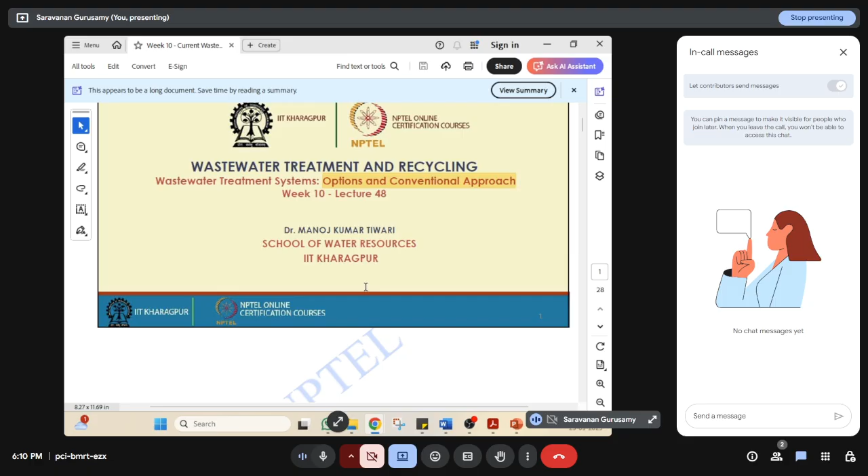Let's move on with the options and conventional approaches for wastewater treatment systems. Earlier we discussed different treatment technologies and how to integrate them. We studied separately about ASP, nitrification and denitrification, and primary settling tanks. Now let's see how to integrate this system.

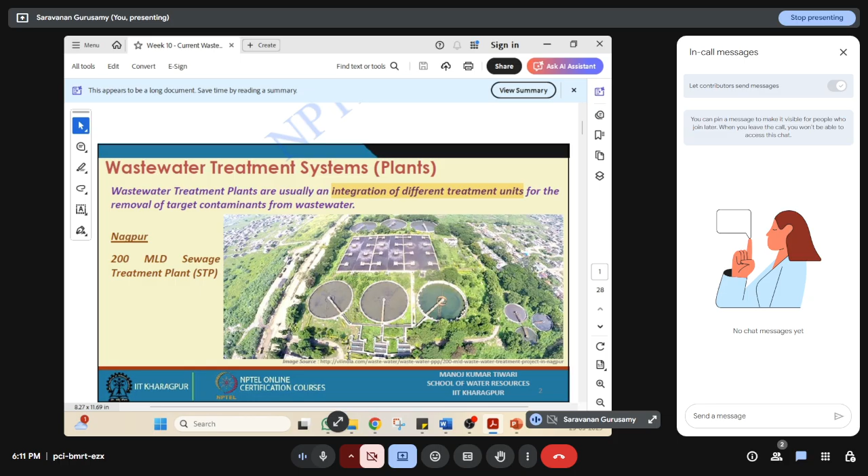For example, if you take Nagpur's 200 MLD STP, there we have an integrated primary settling tank, secondary settling tanks running parallel, along with the aeration tank, followed by sludge management, sludge digester tanks, and sludge dewatering with drying beds, all visible in this aerial view of the Nagpur STP.

Similarly, if you see most industrial units, this picture is from Washington in the US. They have a Blue Plains wastewater treatment plant. You can see how the tertiary treatments are going on in STPs abroad. So several unit operations and unit processes we have discussed.

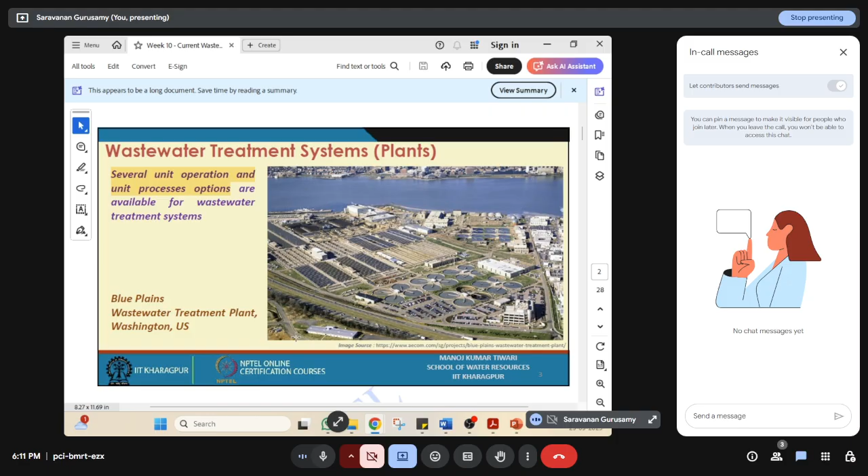Unit operations are physical treatment of wastewater, and unit processes involve biological as well as chemical treatment of wastewater. These several unit operations and unit processes are integrated together to get a complete wastewater treatment system. This is what we have been discussing for the last 9 weeks.

First, preliminary treatment, that is screening and grit removal, then primary treatment focuses on the primary settling tank or sedimentation, which is the major approach to remove suspended inorganics. The secondary treatment plant focuses on soluble organics, using activated sludge process, trickling filters, rotating biological contactors, and membrane bioreactors.

Based on low rate or high rate process, we can classify it into stabilization ponds or aerated lagoons if the quantity is very less. If the quantity is high, like in urban areas, we can go with the ASP process.

In advanced treatment systems, we can go with nutrient removal first, by nitrification, denitrification, chlorination, and phosphorus removal. We can use biological or chemical methods. Biologically, we use phosphorus accumulating organisms, or PAOs. In chemical treatment, we add lime and alum to precipitate the nutrients in the wastewater.

Suspended solids removal is done by filtration, that is membrane filtration. Last week we discussed different types of membranes, from micro, ultra filtration, nano filtration, and RO, and we also discussed membrane fouling.

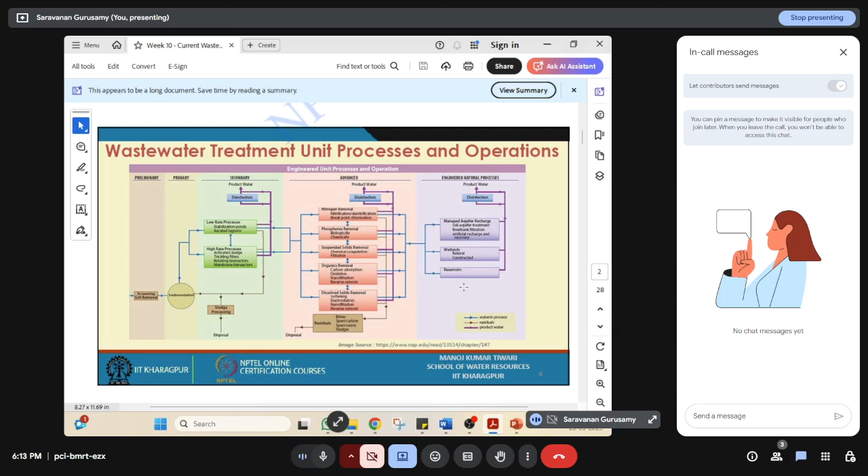Finally, before disposal, we have to go with disinfection.

So how are these choices selected? All are based on how much degree of treatment you need. If you are going to dispose in river water, in a particular stretch from which we are going to extract drinking water, we need a high level of treatment. Or if you are simply going to dispose in the ocean, the treatment requirement will be very less.

You can follow the CPCB guidelines for disposal of effluents. Based on where we are going to dispose, whether in inland surface water, marine, land, or agricultural soil, we can decide which treatment plant we are going to choose.

The regulatory requirement matters too, as every local body has separate bylaws, and based on that we treat the wastewater. Then budget availability, cost, both operational and capital cost. Land availability is another major issue, and based on that the system will change.

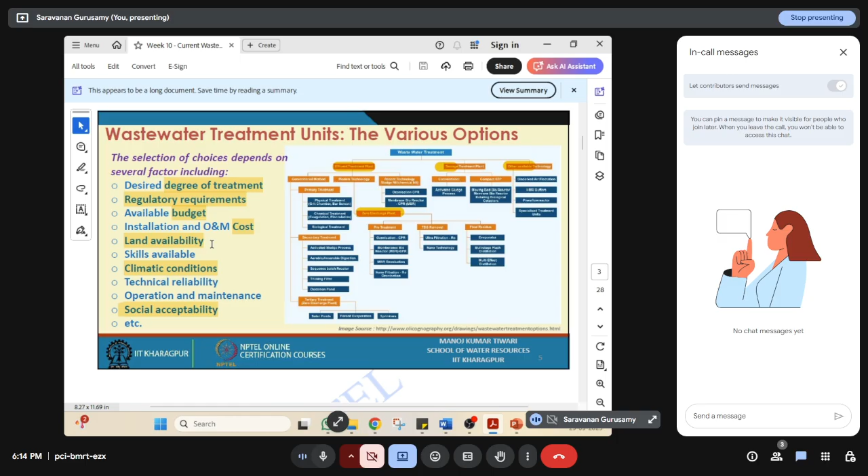Also the skill available and climatic conditions matter, because most biological processes work optimally at certain temperature conditions. Mesophilic bacteria work best at 20 to 35 degrees Celsius, so we have to maintain that required temperature to achieve the maximum degree of treatment.

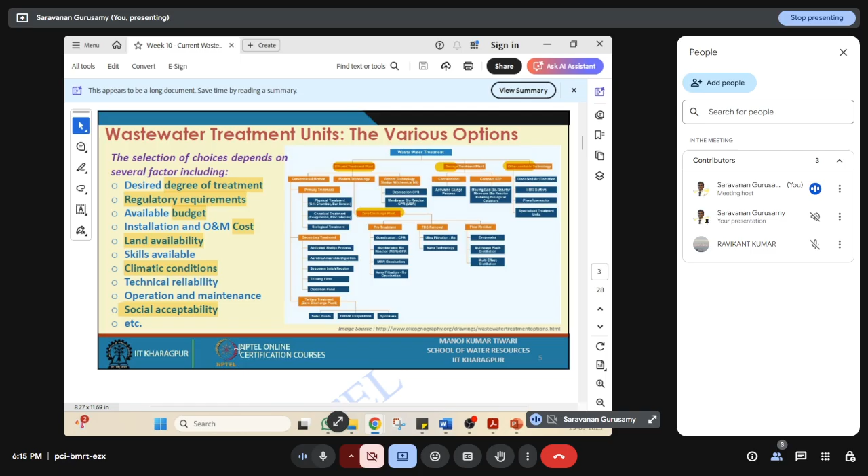Then technical reliability and social acceptance are underlying factors in choosing where we are going to build the plant, or considering who might object during the impact assessment or raise public concerns.

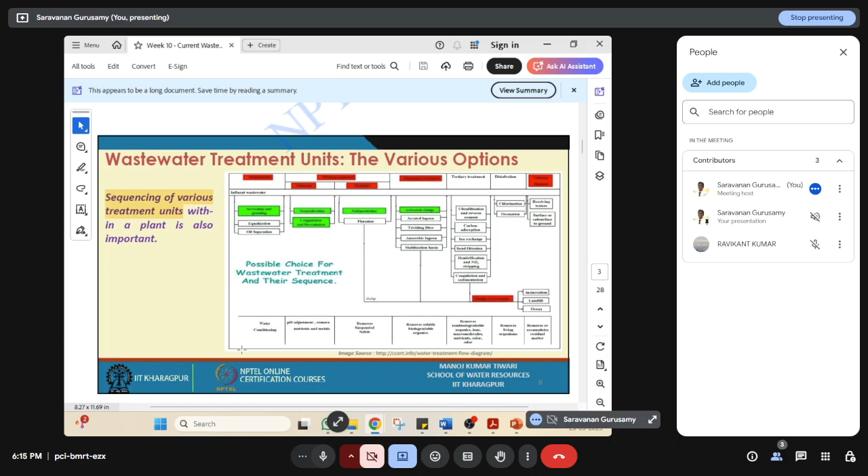Finally, we are going to sequence the various treatment systems. Before, we are going with grit system, primary settling tank, secondary settling tank. But between primary and secondary settling tank, we need to insert an aeration tank. This sequencing matters - which needs to be treated first? Initially, we have to remove the coarser items, which helps prevent damage to the further treatment system. First you remove the coarser particles, then the finer particles, and finally we go with the dissolved particles. So sequencing of various treatment units is an important point in designing wastewater treatment plants.

Conventional ASP will work with raw sewage collection, screening, grit chamber, primary settling, followed by aeration tank and secondary settling, combinedly called ASP, where we have recycling of sludge. Finally, the sludge will be taken to the sludge digestion tank. Then tertiary treatment, if you want, or sludge disposal.

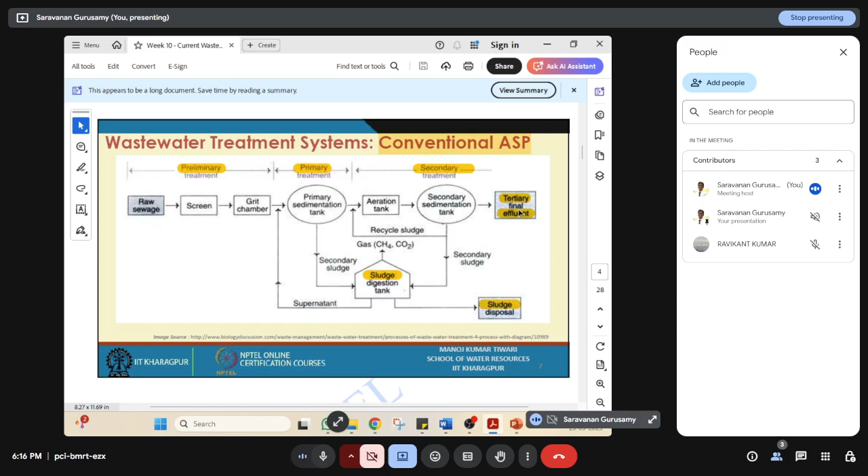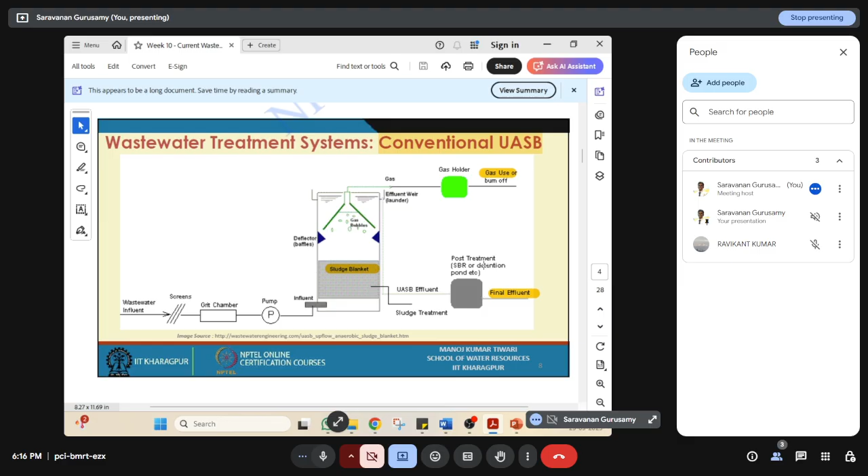Or you can go with the conventional UASB treatment, where the wastewater after preliminary treatment undergoes secondary treatment using an upflow anaerobic sludge blanket reactor. This we have discussed - the wastewater flows from bottom to top through a sludge blanket, which acts as a biological treatment process anaerobically, and lots of biogas is produced. That gas is trapped and can be used for further applications, and clean water can be taken out. This we have discussed in earlier lectures.

Now we are going with integrated systems, first the wetlands. What are the alternate treatment systems to the conventional wastewater treatment system? Can you look into different alternatives? We can mimic the natural process itself. New systems are being developed relying on standard physicochemical and biological processes, optimizing treatment efficiency to reduce cost and energy consumption.

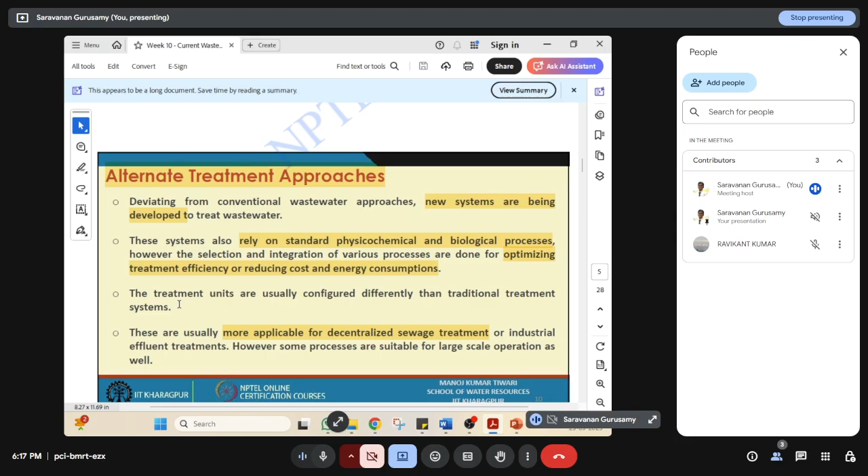Because ASP with recirculation achieves only 70%. If you want 90%, what can we do? If you want 99% treatment, what do we have to do? So treatment efficiency matters, and cost and energy consumption are again a major concern. Based on that we can choose alternate treatment options, more applicable to decentralized sewage treatment plants - we can go with smaller modular kinds of things. Nowadays modular kitchens are very famous, right? Similarly, modular treatment systems you have to choose based on land availability.

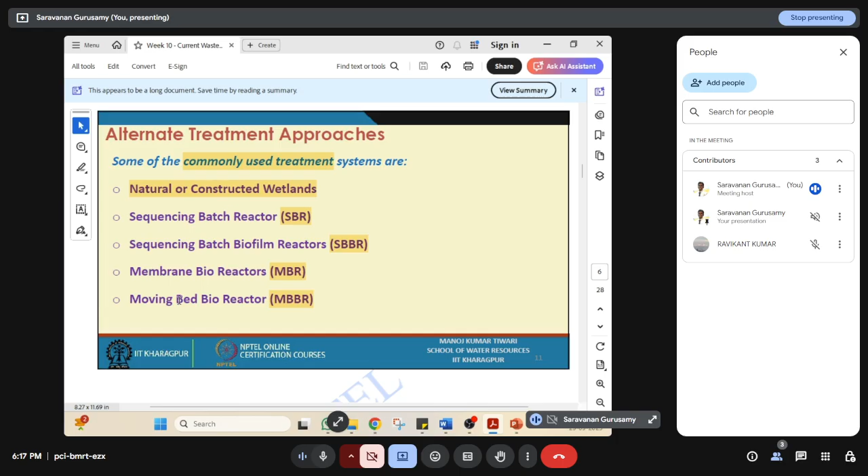These alternate systems you can choose: constructed or natural wetlands, sequencing batch reactors, sequencing batch biofilm reactors, membrane bioreactors, and moving bed bioreactors. Think about all this - we are going to see it in this whole 40 minutes from now.

So what is a natural wetland? The name itself mentions the land is wet, so it's mostly a kind of lake or pond. But mostly it will have a good bio-ecosystem - a whole bioecosystem will be there, like plants and aquatic organisms, all working together to remove the nutrients as well as the organics in the wastewater.

Wetlands are called Earth's kidney, because whenever wastewater passes through the wetland, it purifies the wastewater and gives you pure water out. That's why these wetlands are called Earth's kidney. How forests are called Earth's lungs - like that, it's purifying the air, taking up carbon dioxide and releasing oxygen. Like that, wetlands are called Earth's kidney - they filter the pollutants from the water and the wastewater.

The same principle we can adapt for a constructed wetland, called artificial wetland. This type of wetland is available in most areas, like marshland or kinds of things. You can look into the Ramsar Convention - I will upload some reading materials in the Google Drive. Ramsar Convention organizations are organized to protect the wetlands. In Tamil Nadu itself, we have a large number of conserved wetlands. Ramsar Convention has lots of conserved wetlands to preserve the Earth's ecosystem.

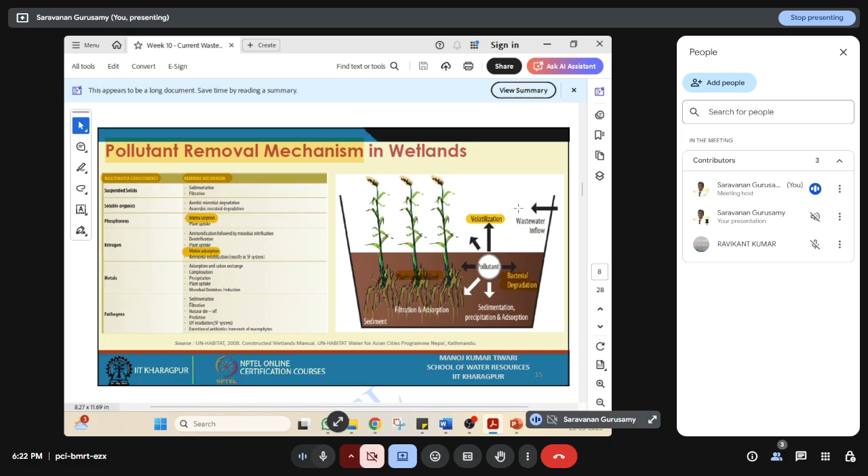How can we remove metal in wetland? Again, the same principles of precipitation, complexation, adsorption and cation exchange apply. Soil acts as a cation exchanger with good cation exchanging capacity, so it can remove metals from the wastewater. Pathogens can also be removed through sedimentation, filtration, or similar to how RO membranes remove microorganisms - this type of bed filter acts as a filter and removes pathogens. And photoremediation, as mentioned, sunlight can act as UV irradiation for the treatment of pathogens in the wastewater.

Think about the constructed wetlands that we have. It offers better control over the hydraulic pathway and retention time compared to natural wetlands. In natural wetlands we can simply dispose of wastewater, but we can't control the effluent quality. In constructed wetlands, we can control how much goes in, how much comes out, the time requirement - that is the hydraulic retention time - and the pathway, whether it goes vertically or horizontally.

That's better control over the operating parameters in constructed wetlands, and it provides flexibility in site selection and sizing. If you have only a smaller area, you can go with smaller wetlands with a lower HRT. What are the components of this constructed wetland?

We need a substrate - the wastewater acts as the substrate. Then the vegetation, which acts as a phytoremediating agent, so plants are mostly required.

What plants can we use nowadays? Our research group is mostly working on constructed wetlands, using different canna indica plants and other types of plants that can easily grow and uptake the nutrients. The nutrient removal efficiency is higher for different types of plants, and that vegetation has to be chosen carefully.

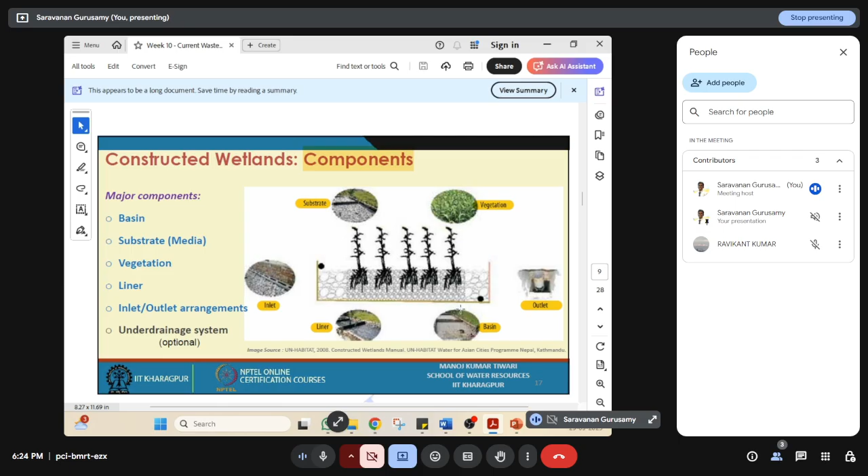Then there's the inlet and outlet for incoming and taking out the effluent, and a liner system to safeguard the groundwater at the bottom. Then the basin, which acts as a reactor. So we have an inlet-outlet system, an underdrainage system, a substrate that is wastewater along with the medium - the soil acts as a medium for plant growth. These make up the whole setup for constructed wetlands.

How do we classify constructed wetlands? Based on surface flow or subsurface flow. Subsurface flow means water is put at the top and flows through the soil. If it flows horizontally, it's a horizontal subsurface flow wetland. If it flows vertically from top to bottom, it's a vertical subsurface flow wetland. Vertical can further be classified as downflow, upflow, and tidal.

If you think about surface flow, emergent plants, submerged plants, free floating plants, and floating leaved plants, everything is happening at the top of the water surface. We don't have any soil medium, so that is a surface flow condition.

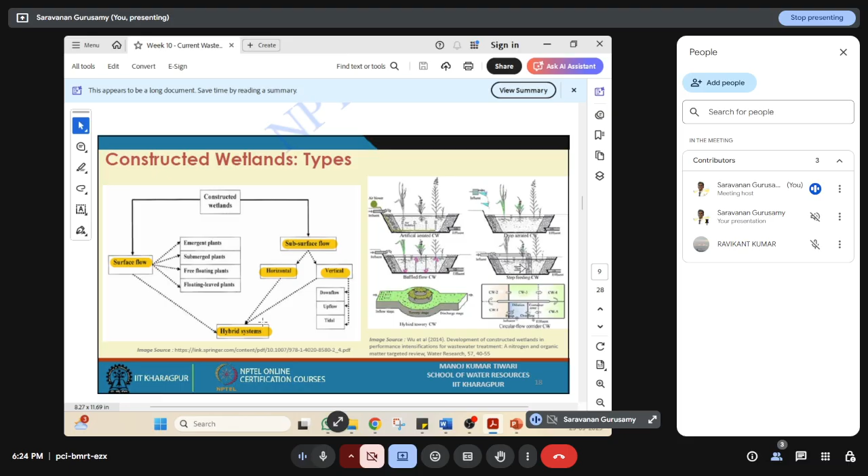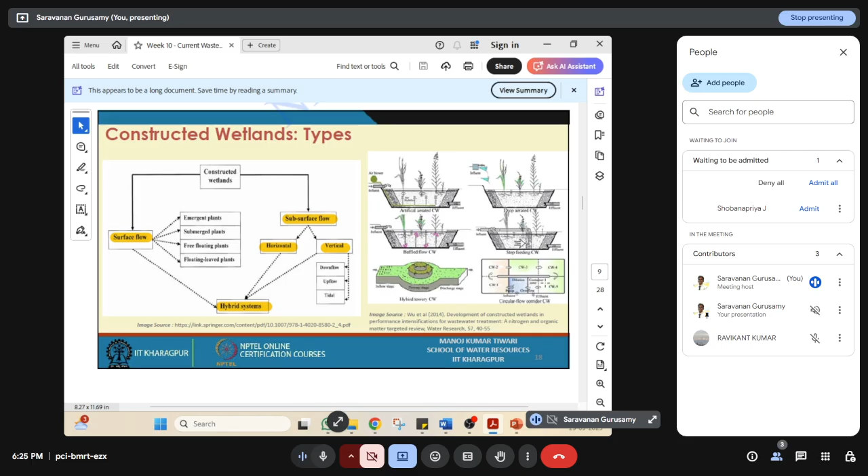If you merge both surface flow and horizontal flow, that is a hybrid system of wetlands. See this diagram, this is subsurface flow - water is going there and then horizontally moving, collected at the right side. Similarly, here water is pushing from all the parts and then coming out, so it's a vertical flow. Then this is a hybrid tower type, where both aeration and vertical as well as horizontal flow are happening. This type of combination hybrid we can also choose. And here are circular flow corridors, so from here it will move through different compartments of different reactors and be treated based on the conditions. That is one of the hybrid systems for constructed wetlands.

As I mentioned, there are three major types: free water surface, vertical flow, and horizontal or subsurface flow. In the free water surface type, sand medium will be at the bottom, water will flow at the top, and the plant will either be floating on the water or tied to the soil. This replicates naturally occurring processes such as wetlands, marshland, and swamp, so the plant will utilize all the nutrients in the wastewater.

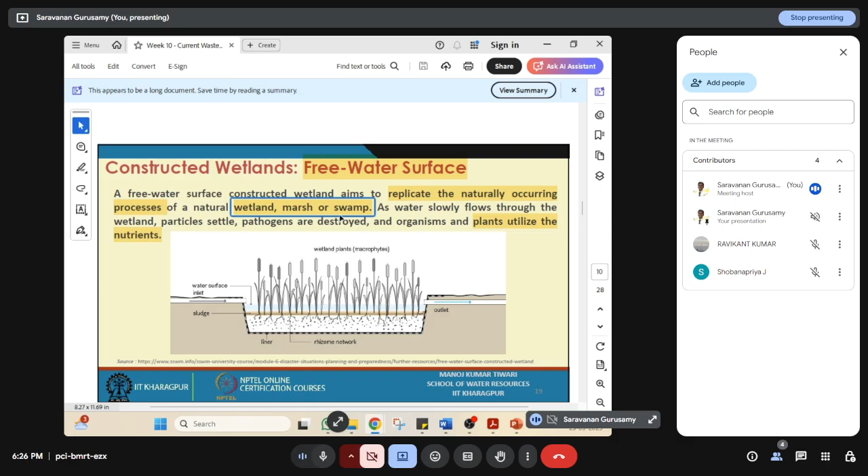We can use wetland because, when using wetland, the organics may or may not be removed, or can even be increased due to addition from the plant. However, nutrient removal will be very high because the plant takes the nutrients from the wastewater. So we can use this as a tertiary treatment system.

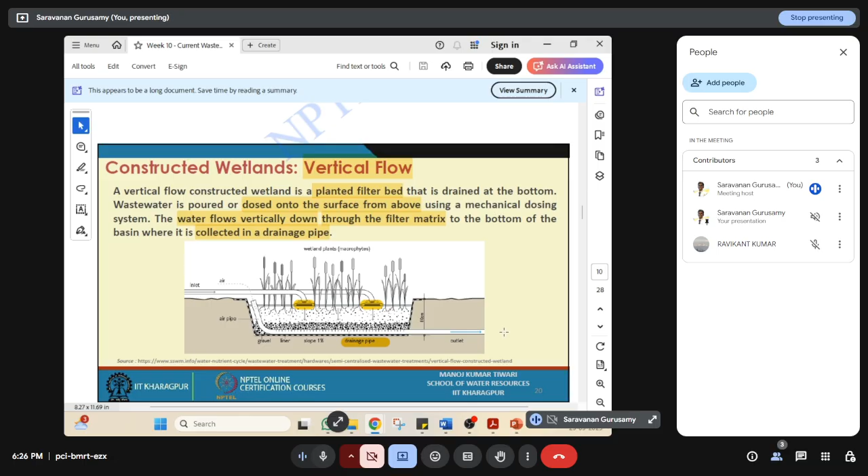If you consider subsurface flow, it is again classified into horizontal and vertical as I mentioned. In vertical flow, water is dosed on the surface from above, so it flows vertically and reaches the bottom. The bottom liner has pores to collect the effluent, which is collected in a pipe and goes to the right side. If it is horizontal flow, the water flows the whole way horizontally and is collected at the right side.

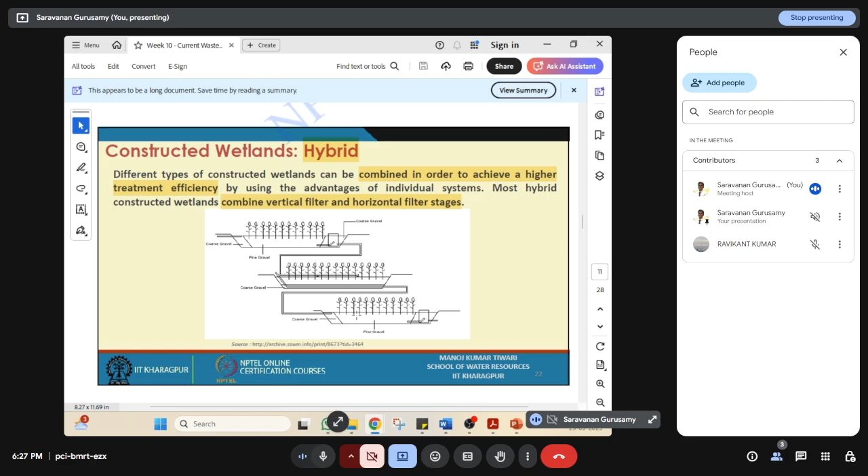Here absorption will be very high, using large gravel and sand filled basins. This type of basin acts as both an absorption and filtering medium. In the hybrid system, vertical as well as horizontal flow will be combined, and both surface and subsurface flow can also be combined in hybrid constructed wetland systems.

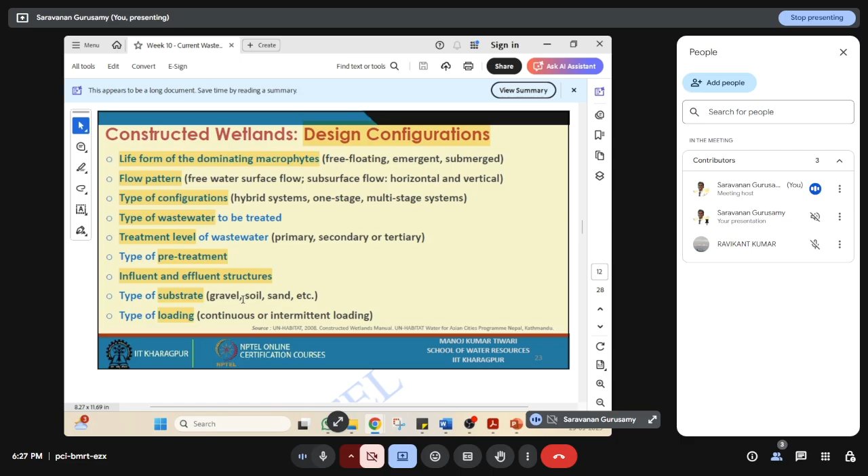So what are the design configurations? The life forms of the dominating macrophytes - which type of plant you are going to use and where it will grow, at the top, in the water, or in the soil - we have to think about that. Then the flow pattern: horizontal, vertical, or free flow. Then the type of configuration, like hybrid, one-stage or multi-stage. Then what wastewater you are going to treat, the treatment level, type of pre-treatment, influent and effluent structures, and type of substrate, because we can fill with gravel, sand, or soil - we have to think about all that. Then the type of loading, which can be continuous or intermittent in constructed wetlands.

Now, what are the advantages of this type of constructed wetland? It is very less expensive because it's mostly based on natural treatment processes. No mechanical equipment or power supply is required except for the flow. So there's utilization of natural processes, simple construction, simple operation and maintenance, and cost-effective process stability. These are all advantages of constructed wetlands.

But the limitations include the larger land requirement. If you are going to plant the whole system instead of using a single tank, you have to go with a bigger land area, so that is a land requirement issue in constructed wetlands. You can optimize the process with different hybrid technologies.

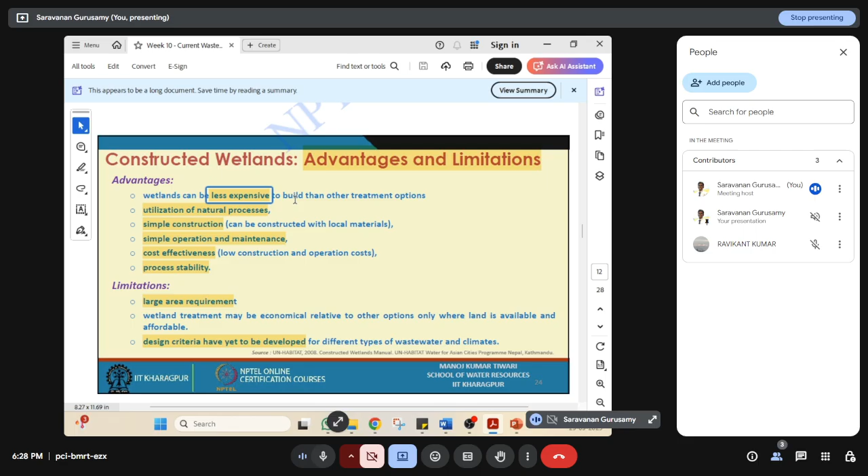Design criteria have to be developed for constructed wetlands, so you can follow certain guidelines for wetland construction. We have a constructed wetland manual by the United Nations Human Settlement Program, and a handbook for constructed wetlands by US EPA, which also provides guidance on constructed wetland treatment for municipal wastewater and for wildlife habitat. I have downloaded these four resources and given them in the problem solving session.

One second, I will open and show you. So in the problem solving session, you can see this.

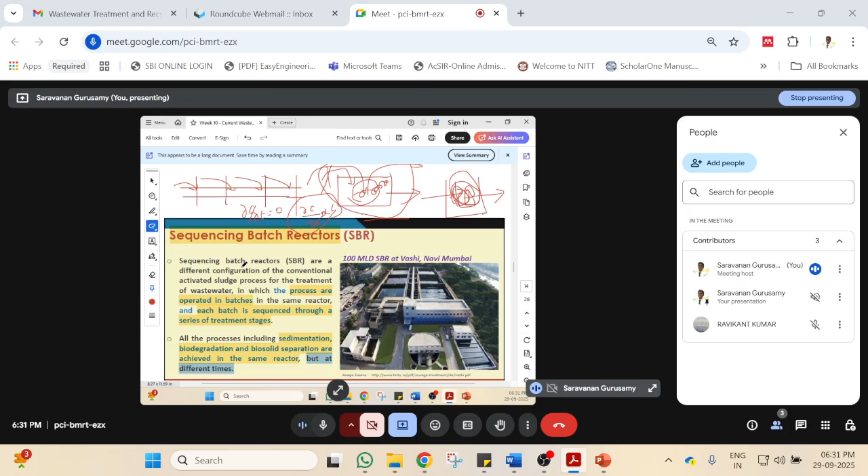The same process, if you follow in a batch mode, is called a sequencing batch reactor. What is the sequence we are going to follow? Processes are operated in a batch - like sedimentation, biodegradation, separation - everything happens in the same reactor. We don't want an aeration tank, we don't want a sedimentation tank. Everything happens in a single reactor.

How? First we are filling the tank and stopping the flow - that is the batch mode. Here we are mixing and aerating, and that mixing and aeration will help it react, similar to an aeration tank. After reaction, the aeration and mixing will be stopped and it will be allowed to settle, similar to a secondary sedimentation tank - all the solids will settle. After some time, the clear water at the top will be taken out; that is called the decant. After taking it out, some sludge will be wasted and some sludge will be retained for the next cycle.

So you got the sequential batch setup - it's a sequential cyclic reaction happening in a batch reactor. The first step is fill, with mixing and aeration. The second step is react. Water will then be decanted, with no mixing and aeration during that phase. Finally, the sludge will be mixed and aerated and some will be wasted. That's the ideal condition: fill, react, settle, decant - the ideal stages. You got the whole system. That's the sequential batch reactor.

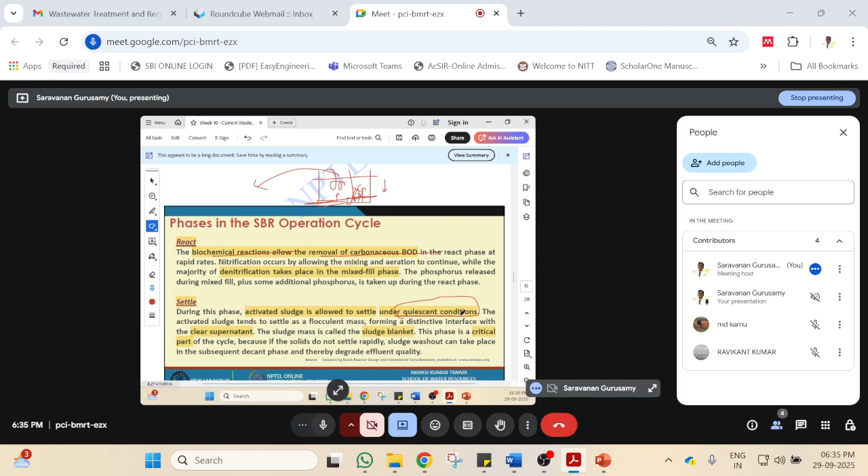This is a quiescent condition. Quiescent means very idle, there is no mixing, no aeration - the calm condition. So the sludge blanket will settle at the bottom, and it's a critical part because you should not disturb the settled thing. If you start mixing or anything happens, the settled particle will again come into the water.

So it should be taken care of very carefully. Then decant. Decant is also a problem because we are taking out the clear water at the top. Settled sludge will be here, clear water at the top, and we have to take the water out without disturbing the settled sludge. So we can use a decanter.

Decanter is kind of a pipe with holes that will have a vacuum pressure and take out the water. We can use a floating decanter that will float on the tank and it will take the water and the level will be reduced. Or you can have a fixed arm, where the arm will go down and it will take the water. Similar kind of floating and fixed arm conditions you can use to decant the water.

After decanting, you can switch on the mixer and aerator so that the sludge alone will be mixed, some will be wasted and some will be used for the next cycle. So that's why the whole cycle will be fill, react, settle, decant, and idle condition. You got the whole setup here.

See, the feed is happening there, substrate will be given as an input, and during this reaction, carbonaceous nitrification will also be removed, nutrients will be removed. Then settling phase, there clarification will be happening because the solids is settling. So clarification, then decanting, that treated water will be removed. Finally, excess sludge will be taken out. That's called idle condition.

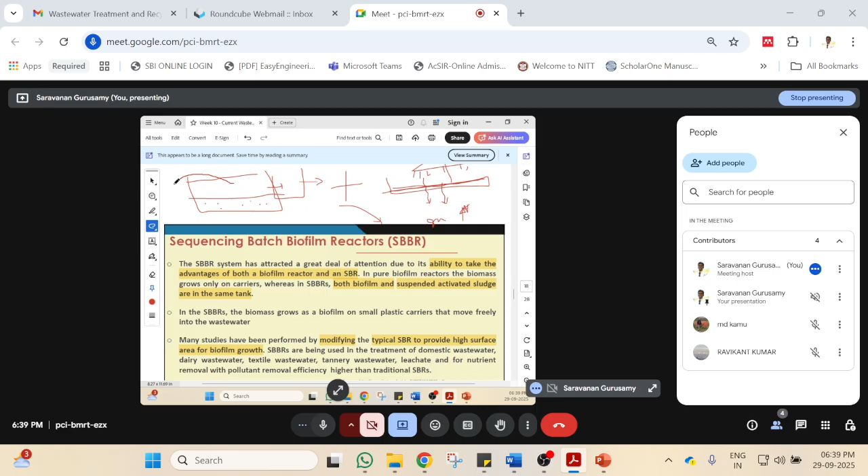ASP is a suspended growth system. We are merging both suspension and attached growth in the SBBR system. But the tank is a single tank. After the carriers settle, water is taken out in the same reactor, and again we can mix that medium.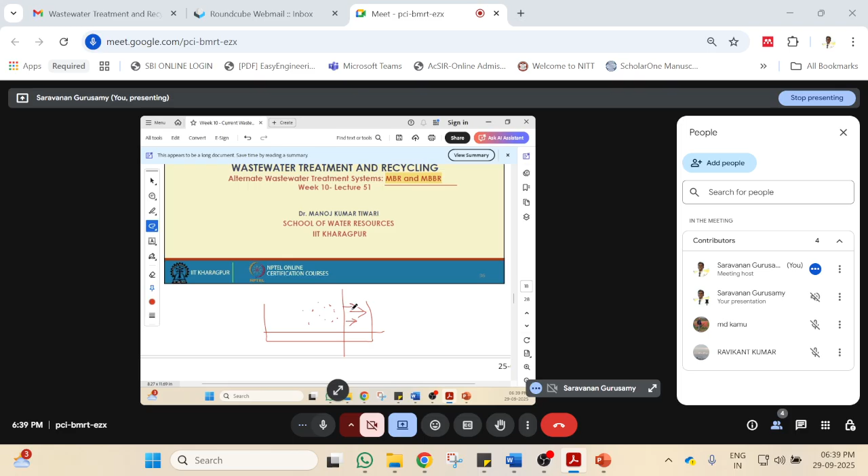Next we go to MBR, because if settling is not proper, that's a problem. So how to remove that sludge? We can have a membrane. That membrane will stop the sludge from the SBR, so only pure water comes out. No need for settling - all solids are retained, only water comes out after reaction. It can act as a continuous reactor. That is called MBR, membrane bioreactor. M always stands for membrane, in a biological system combining suspended growth and biological treatment with membrane filtration equipment.

It's the same as ASP, because we are aerating, all the microbes take in air and degrade the organics, so water is always coming in. But instead of settling the sludge, we filter the sludge with the membrane. That semi-permeable membrane, like microfiltration or ultrafiltration, you can choose. Through the pores, only clean water comes out. This filtration technique merges with the suspended growth system, so sludge is retained in the aeration tank, and only clean water comes out. That is the MBR reactor.

Here the secondary sedimentation basin can be replaced with a membrane. In ASP we have an aeration tank and a secondary settling tank. Here both can be combined into a single tank, but we need a membrane to filter - secondary sedimentation is replaced with a membrane. That's why it's called membrane bioreactor. Here the operating sludge condition is higher, 10 to 20, because the sludge isn't settled, it's retained in the system itself. So high sludge concentration, high removal, good effluent quality - that is the major achievement with MBR at a low reactor volume. Even with a smaller tank, we can achieve good removal efficiency.

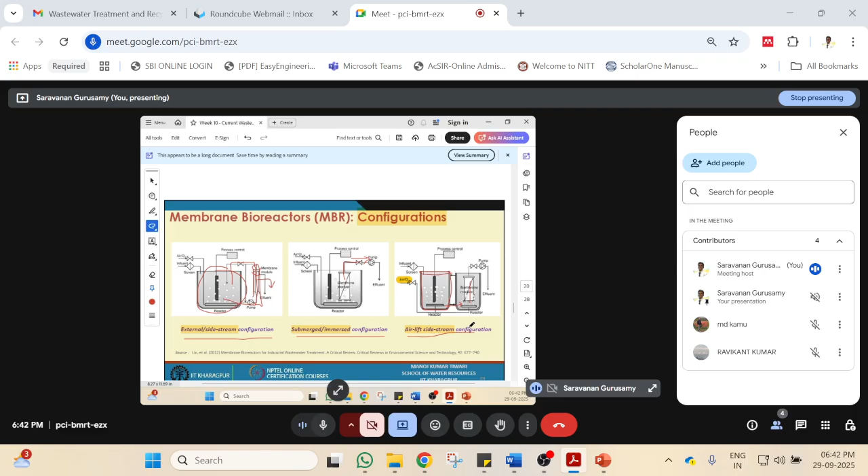This is a side stream configuration, with air lift. So based on where we place the membrane, we can classify MBR into different configurations.

See the external configuration type - the membrane module is outside the bioreactor. It's a simple aeration tank, but the membrane is outside to filter, similar to a secondary settling tank with a membrane. This allows easier membrane replacement and high flux condition, but high energy consumption is required because we have to pump the wastewater from here to here.

In the immersed condition, we can apply vacuum to take out the water - this is the driving force. You either apply pressure from outside or vacuum from inside. Both work to extract clean water. Here there's less energy consumption but less rigorous cleaning process, and cleaning needs to be more frequent because of lower tangential velocity.

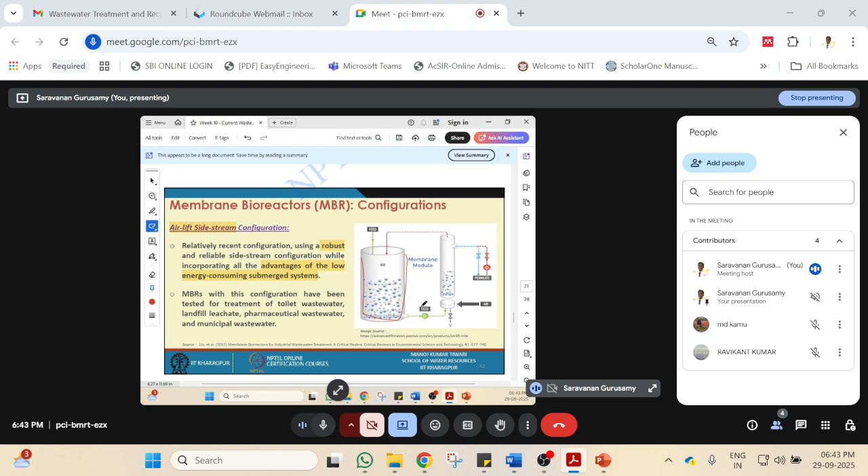Here, see, the third type is the airlift side stream. The same bioreactor is there with aeration, and another reactor with aeration, but the membrane is also there in that reactor. That is the airlift side stream configuration - a robust, advanced technology with low energy consumption as a submerged system.

So the problem is membrane fouling. What is membrane fouling? All the membranes have pores. If you think this is a membrane, it has a pore, a small pore. Through this pore only, water will come out. If the pore gets clogged with microorganisms, the pressure requirement will be higher or effluent will not come out. So this clogging of membrane is called membrane fouling.

The major drawback of MBR is it reduces membrane performance and membrane lifespan, attributed to suspended particles, colloids, solutes and large flux deposit on the membrane and clog the pores. It declines the permeability. Initially the permeability will be very high after cleaning, and then it gets reduced, so clogging of pores happens and effluent quantity is reduced.

So we have different forms of fouling like pore narrowing, pore clogging, cake formation. A new membrane has good pores, water can easily go through, permeability is very high. But when microbes start growing, they start attaching to the pores - that is pore narrowing. Initially it will be big, like 2 micrometers. Now it gets reduced to 1 micrometer because of the deposition.

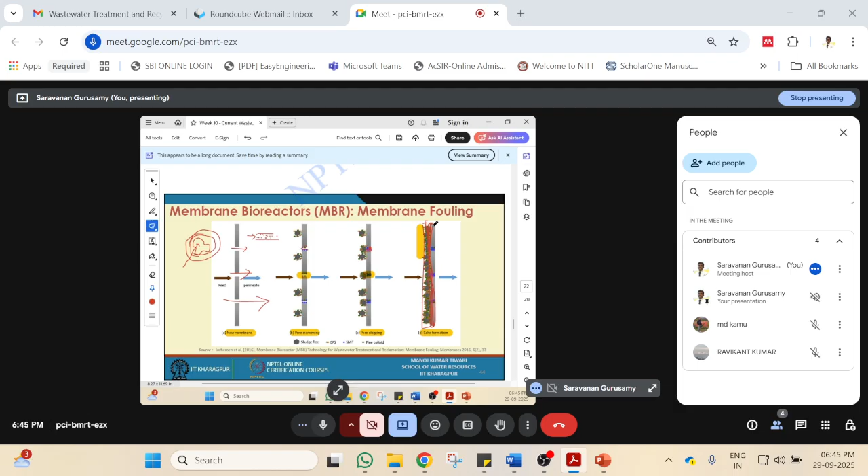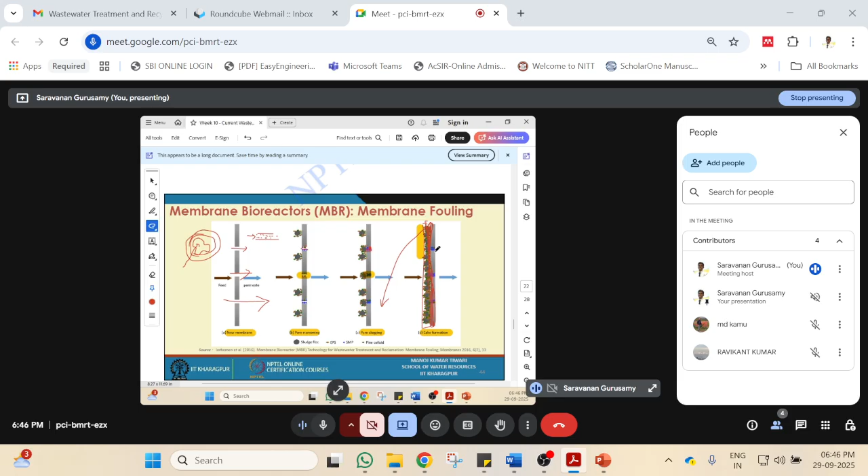If the whole pore gets clogged, then it is called pore clogging. If the whole membrane surface is covered with microbes, then it is cake formation. Once the cake is formed, the bottom layer becomes anaerobic condition and the bacteria cannot survive because it's aerobic bacteria - that will detach from the membrane, and the whole cake will be taken out. That is called cake, what we say. A tearing process happens and the cake comes out, so the pore becomes clear again and permeability will be high. So pore narrowing, pore clogging and then cake formation will happen.

So what are the things that will clog? Sludge will clog, extracellular polymeric substances produced by the microbes, or suspended microorganism particles, or fine colloids - these will clog this type of membrane.

So what are the factors that affect membrane fouling? Feed and biomass property - what wastewater we are giving. Based on that, MLSS concentration, floc size, alkalinity, pH, salinity, because salts may also deposit in the membrane - so this inlet wastewater condition will affect it.

Then the membrane property - which membrane type, whether the membrane has good affinity or not, roughness, surface charge of the membrane, pore size of the membrane will play a role. Then finally the operating conditions like time, SRT, HRT, F/M ratio - all these physical and biological properties will affect the membrane fouling.

So how to retard this membrane fouling? We can add some anti-fouling measures like air-induced cross flow or gas bubbling, intermittent permeation and relaxation, particle deposition and diffuse back to the reactor. We can add water from the other side and flush out the flocks, and then chemical assisted backwashing, and use air jet to remove that, and anti-fouling products. These are all anti-fouling measures for retarding membrane fouling.

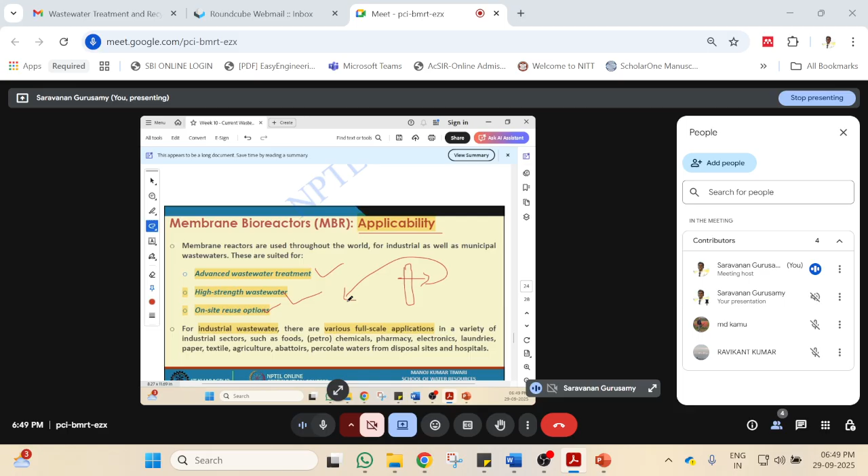Nowadays I am seeing in lots of industries as well as municipals, MBBR, moving bed biofilm reactors. Similar to MBR, we have a continuous flow, not batch. As I mentioned in the SBBR, if we have a plastic medium, microbes will grow on it. We have aeration, so the plastic medium will float, but there is no sludge because most of the microbes are attached to the plastic media and it will eat the organics in my wastewater. So this plastic will not come out along with the water, it will easily settle and sludge will be attached to it. That is moving bed biofilm reactor, the bed is moving. It's a combination of biological treatment method, ASP method, and biofilter.

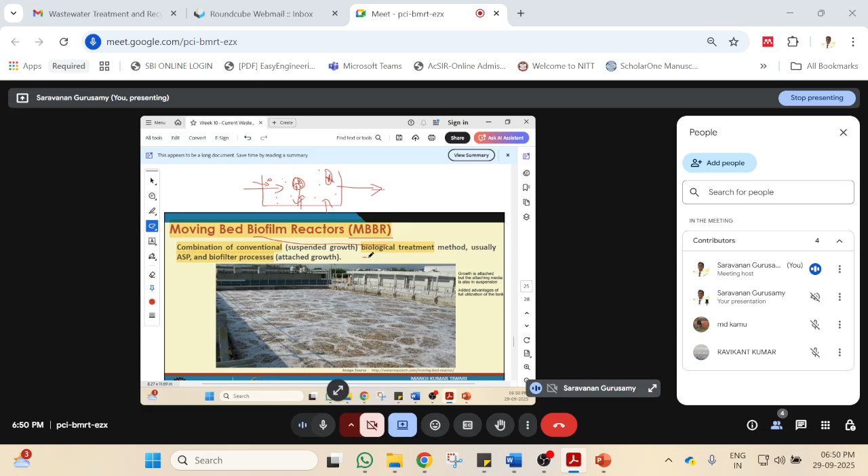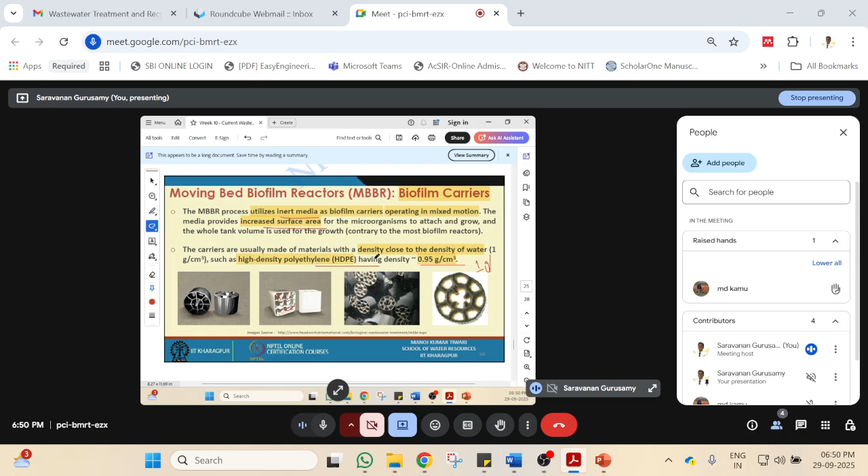Biofilter processes, this is the plastic media I'm talking about. It can be any inert media with a high surface area because the bacteria have to grow everywhere, so we need a good surface area of material. Density close to water, then only it will be in suspension. Water's density is 1 gram per centimeter cube, so HDPE you can use, having density of 0.95 gram per centimeter cube. Surely it will be in suspension. That is the principle you have to think before choosing the biofilm carriers, these are all called carriers.

In MBBR, we can apply high density population of bacteria, so high rate of biodegradation will happen because instead of bacteria being in suspension, I am giving media for them to grow. So more bacteria will grow, more degree of treatment. No need of F/M ratio because microbes will be attached here, self-maintaining at optimum level, does not require backwashing. The carrier will be mixed in the tank during aeration and mixing itself, so no need to apply a separate mixing condition - it will be easily mixed during aeration because it has similar density to water. It will prevent clogging, because if you add a membrane, that will get clogged by solids, but if you use carriers, the sludge will be in the carrier, so it will not affect the filter. So membrane fouling or clogging will be prevented.

Maintenance of MBBR includes screening, influent equalization, clarifier system, and sludge handling - that's the major maintenance you have to follow. We have anaerobic MBBR and aerobic MBBR, so to do denitrification initially, and then nitrification and organics removal, you can use any combination of these to achieve nutrient removal and organics removal.

The MBBR advantages are low power consumption, upgradation, flexibility, and aesthetic. But the disadvantages are the media - how much time we have to replace the lifetime of the carrier media, and the other problem, high running costs. These are all disadvantages of the MBBR system.

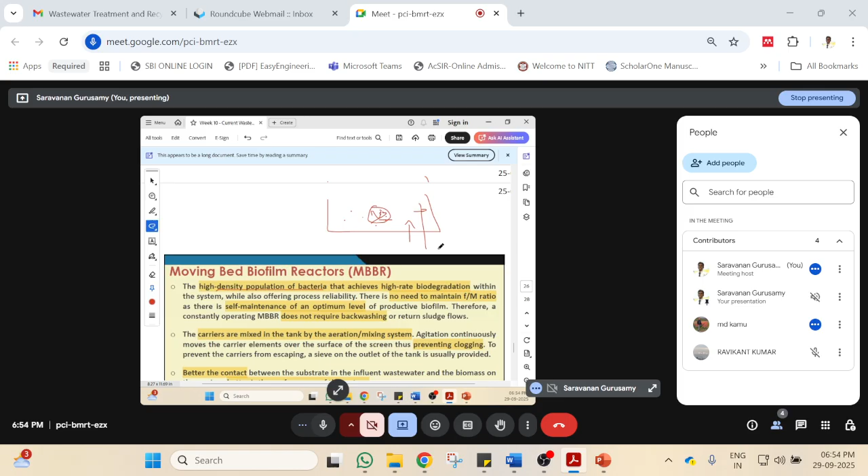Then we used membrane, so membrane bioreactors, and also the MBBR system. Why is it called a moving bed? Because the bed itself is moving. That's why it's called moving bed bioreactor. See the name itself - sequential batch reactor has biofilms, that's a carrier. Similarly here, moving bed, that's the biocarrier, same carrier we're discussing.

Bioreactor, membrane bioreactor - so we have a membrane but it's a bioreactor. Both of these are batch reactors, these are continuous reactors. You got the whole idea of today's lecture. If you have any doubt, please unmute and ask, or you can post in the chat box.

Sir, please. Hello? Sir, do you have any doubt? You have unmuted, I guess. Hello?

Okay, if you have any doubt, please post it in the chat box, or you can unmute and ask. Otherwise, let me go through the problem solving session for today. Please post the answers in the chat box. I'll read through the old assignment problems. These are all simple topics only today, so you can easily finish it off. Can I read, or please post the answers?

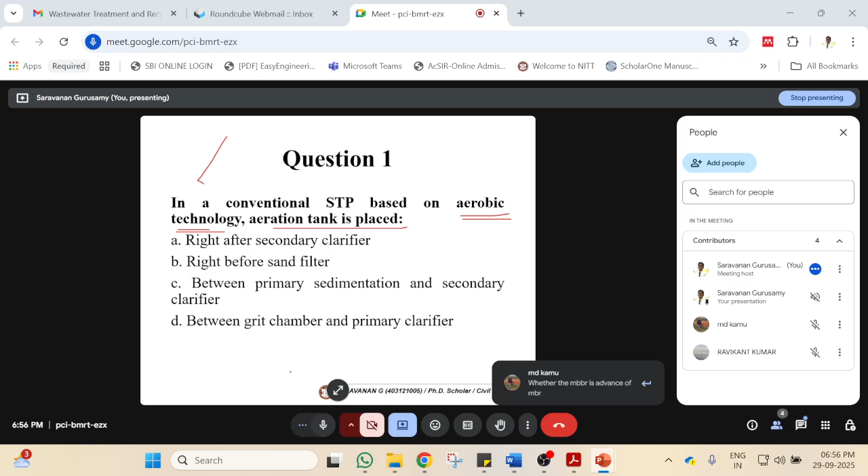Whether the MBBR is advanced compared to MBR - actually, all this research happened in a similar decade. All the research was going on, and it's saturated. Now people are working in the field with these types of things. So we can't say which is advanced or which is conventional, which is older, which is advanced. But based on the degree of treatment required and cost availability, you can choose. If you have a membrane, you can go with the MBR. If you have plastic carrier media, you can go with the MBBR. So the efficiency will be more for MBR, so I can say MBR is an advance on MBBR because the efficiency is more.

Let me start. Hope I've cleared your question. Okay, we will move to the question here.

So in a conventional STP, we have a screen that will remove big inorganics, suspended inorganics. Then a grit chamber, which again removes the inorganics. Then we have a primary settling tank, which removes the suspended organics. Then we have an aeration tank to remove the soluble organics, before the secondary sedimentation tank. Right? So they are asking whether the aeration tank will be placed between the primary settling tank and secondary settling tank, or secondary sedimentation tank - so between primary sedimentation and secondary clarifier is the answer.

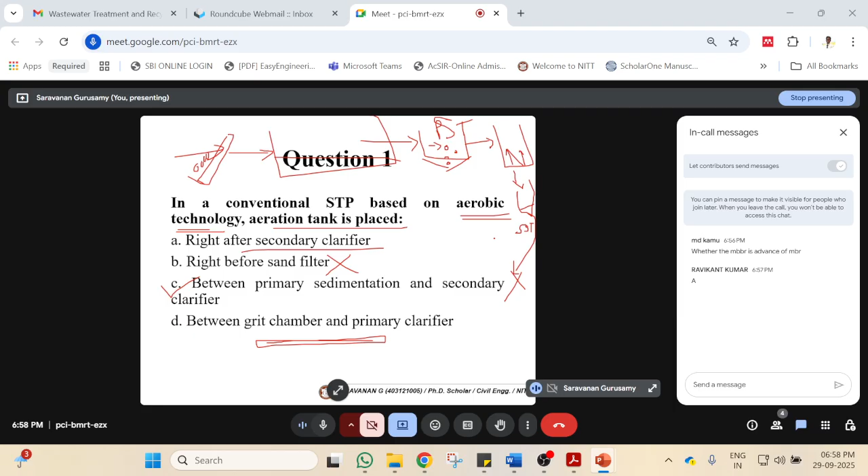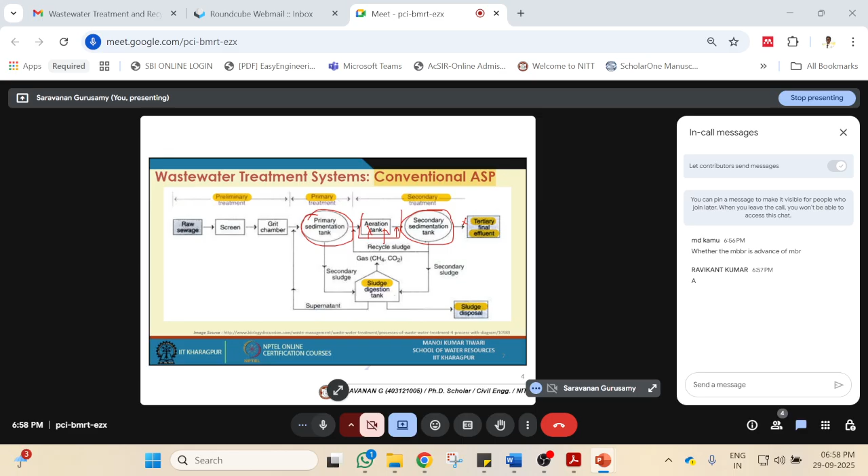I'll go to the second question.

Which of the following is a major challenge in adopting constructed wetland for sewage treatment? They are asking about the disadvantage. Larger area requirement, complicated construction? No, it's actually easier construction because you simply use the plant, fill sand, and let wastewater flow through, only needing a pipe at the end for collection. There is no mechanical energy required, so it's a simple construction.

Intricate operation and maintenance? No, there's no operation and maintenance needed, the plant will simply grow. Expensive to build? Not that much costly, it's cheaper. Land area requirement is there, if you want a higher degree of treatment you need a bigger area.

You can optimize with a smaller area also, that type of research is required. So we are working on constructed wetland optimization processes nowadays. We have also incorporated some carbon sources to act as a denitrifying agent. That's what our research focuses on. One of our research teams is working on constructed wetlands.

So the problem is large area requirement. The limitation is large area, but it is very cost effective, with simple operation and simple construction. Now, the plant uptake or absorption process in wetlands can remove certain pollutants. Wetlands remove mostly organics, inorganics, metals, nutrients, pathogens, everything is being removed.

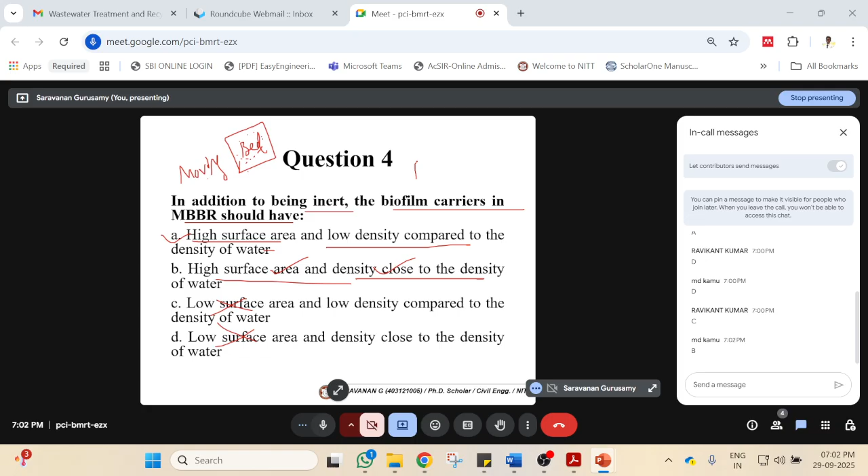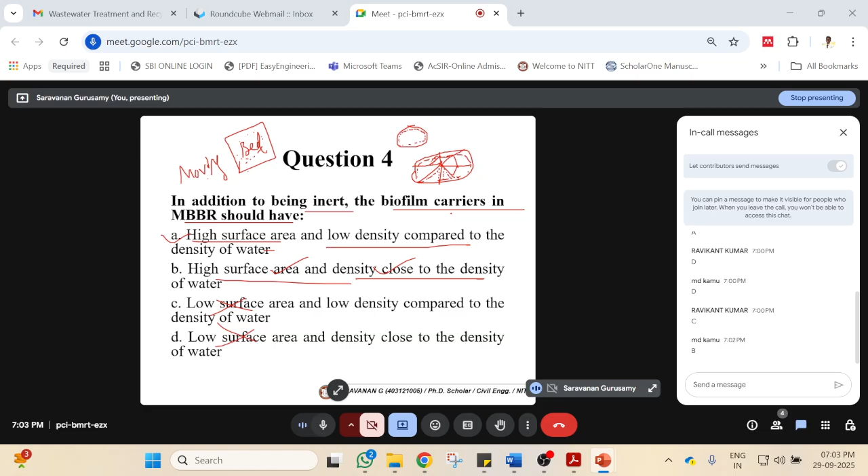Why does it need high surface area? If it is a simple circle, only that area is available for microorganism growth. But instead of a circle, if it has larger sections with cross sections, microbes will grow everywhere, here, here, here. So you have to increase the surface area. That's why all the biofilm carriers are designed with increased surface area or different shapes.

Similar things happen in the adsorption process also. The microbes are attached to the surface of the biofilm carriers. So the requirement is: it should be inert, it should have higher surface area, and its density should be close to the density of water. Why? It should be floating, it should not settle, because the microbe-attached biofilm carriers should remain in suspension. So HDPE is used to maintain the density.

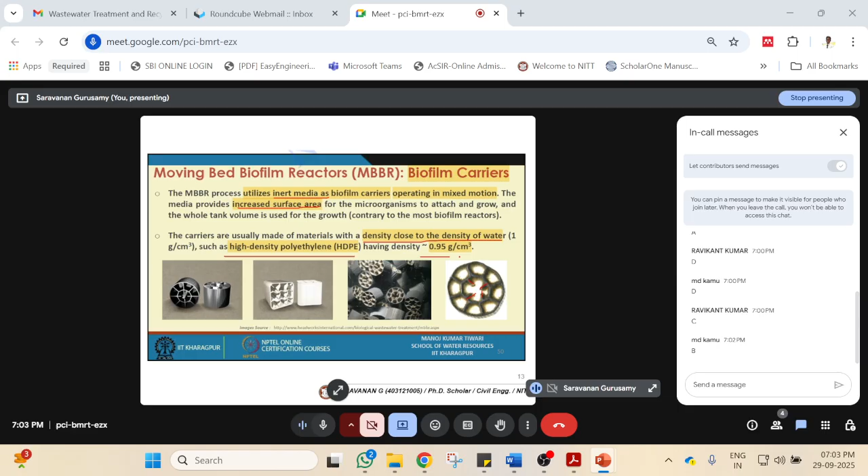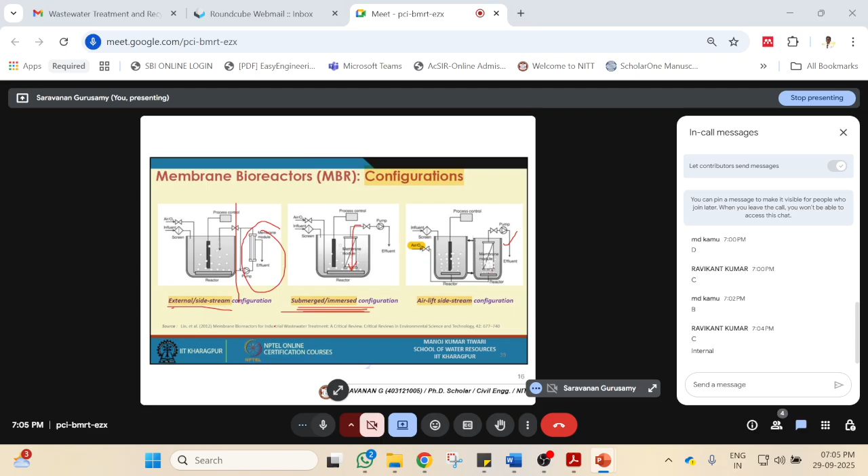So this is internal, sir. Submerged is internal in the same reactor. Once you have a wall between the membrane and the reactor, then it's external. Please correct - so it's external. Actually it's confusing by seeing the image, but if it is a wall, it's external. If it is having air, then it's an air-lift. It's not having air, so it's external MBR. Can be simple, okay.

So sixth question: match the components of a constructed wetland with their suitable examples - macrophyte, substrate, liner. For a constructed wetland we need an inlet, an outlet, a substrate, wastewater, the media, the base, the liner at the bottom, and the plant. Macrophytes are the plant, right? So these are all the requirements.

So what can we use for the macrophyte, for the plant? Water lilies, right? We can use water lilies as the macrophyte because it can be suspended on the water, and it can also go up to the soil. So water lilies can be used. For substrate, sand can be used. Plastic can also be used as substrate, but plants will not grow in plastic, so sand is a good substrate - we are filling sand here. Then liner - liner is plastic, because the water going to the ground is retarded here, so plastic needs to be here.

So the answer is B, A, C - A is correct. Yes, correct. We need a substrate that can be sand here or gravel. We need vegetation that can be any plant like water hyacinth, water lily, Canna indica - you know Canna indica, right? Some kind of banana-like leaf will be there, so that will be Canna indica plants. Then outlet and inlet can be a pipe, a PVC pipe. Liner can be a plastic liner at the bottom, and the basin will be a concrete reactor.

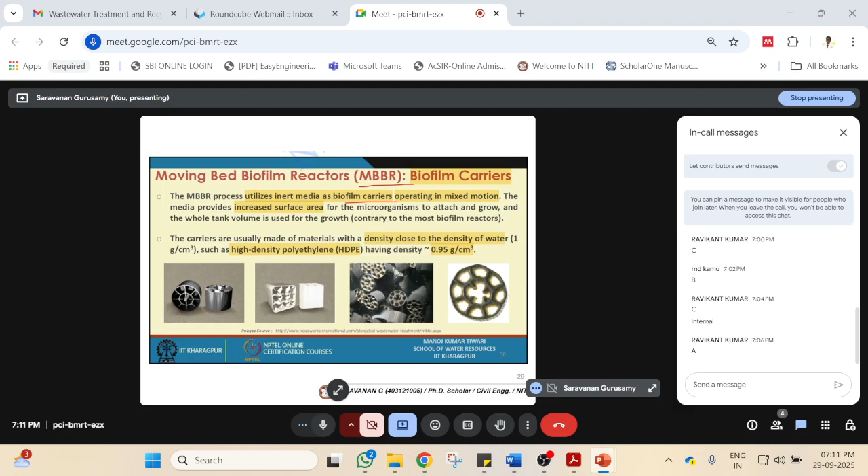10th question. Please post your answer in the chat box. A complete disinfection can be achieved through constructed wetland, SBR, MBBR, or none of the above.

Are we using any of this for disinfection? To remove the microbes? All are biological treatment systems, so microbes will always be there in all the systems. So it's not a disinfection process. After the treatment, the effluent is taken out and we have to use a separate disinfection process, a tank, or a plug flow condition. So none of the above is correct.

You got it? Yeah. So the next 5 questions are based on this figure. The adjacent figure shows what type of treatment system. SBR, right? Sequential batch reactor is one tank at different times; it will act as a different system in a single reactor.

So they are asking which stage is settle. What is A? Fill, because we are filling the wastewater. What is B? We are putting aeration, we are putting mixing.

What is this? React. What is C? After reaction, it needs to be settled. So settle is C. What is D? After settling, the pure water will be taken out, so that is decant.

You got it? Sorry for that. Actually, A, B, E is correct. These three require no aeration.

Can you answer the 14th question? Stage D represents what stage? You have already seen, this is a decant stage. Yes, this is what stage is D? Decant stage.

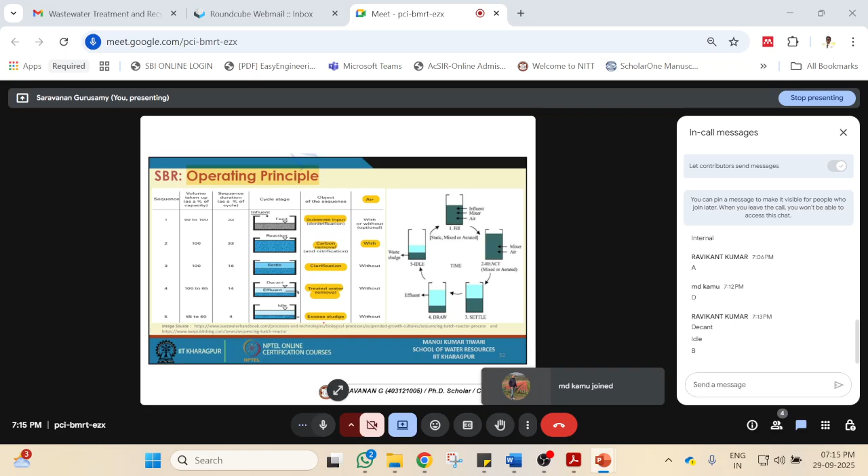Final question. Waste sludge is withdrawn where we will take out the sludge, and the remaining sludge we will use for the next cycle. At the end, which stage is that? Idle stage. What is that? E. So option D is correct.

Okay, there only we will take out the excess sludge. See here also water is taken out, here the sludge is taken out, that's why there is two arrow marks. Here there is an arrow mark to fill. These two, that's a batch; so once filled, until taking out, we should not fill again. That's a batch reactor, that's why SBR.

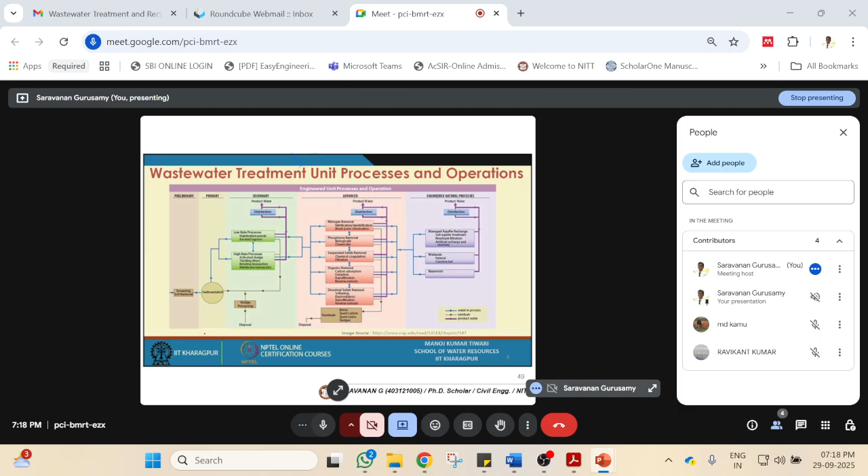Okay, yes, see this whole flow chart. Second question: which of the following treatment processes are most likely to occur in a constructed wetland? Adsorption will happen, yes. Phytoremediation will happen. Bioaccumulation will happen. Sterilization will happen? No, because it's not pathogen removal. Chemical precipitation will also not happen, I guess. Filtration will happen. So A, B, C, F. So I think option D. Did you get it? See that list: adsorption, filtration, hydrolysis, biodegradation, bioaccumulation, phytoremediation, and photoremediation will happen in natural as well as constructed wetlands. Not sterilization, not chemical precipitation - we are not adding any chemicals. It's a natural process, right?

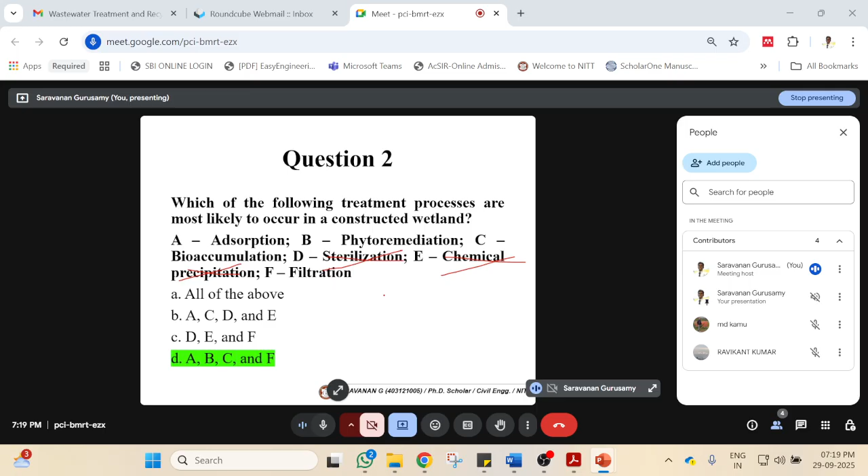Okay, nitrogen and phosphorus removal likely happen in the constructed wetland by what principles? As I mentioned, nutrients will be taken up by plants. Also, matrix adsorption will also happen in the nutrient removal in constructed wetland. So both A and B are correct.

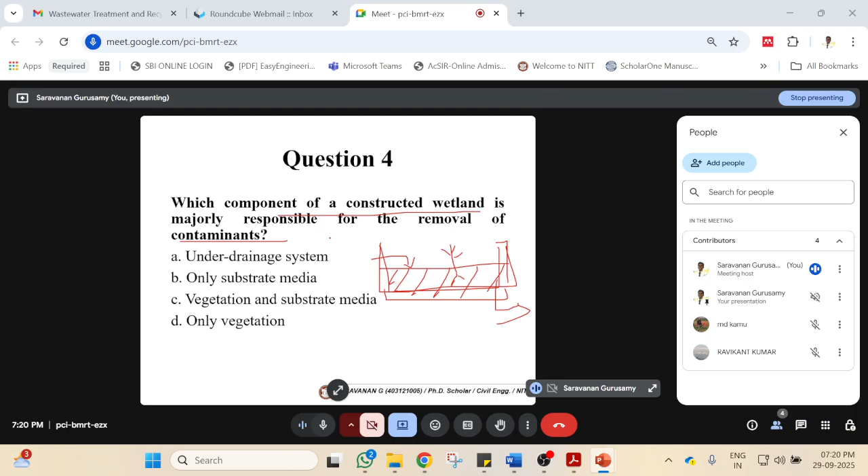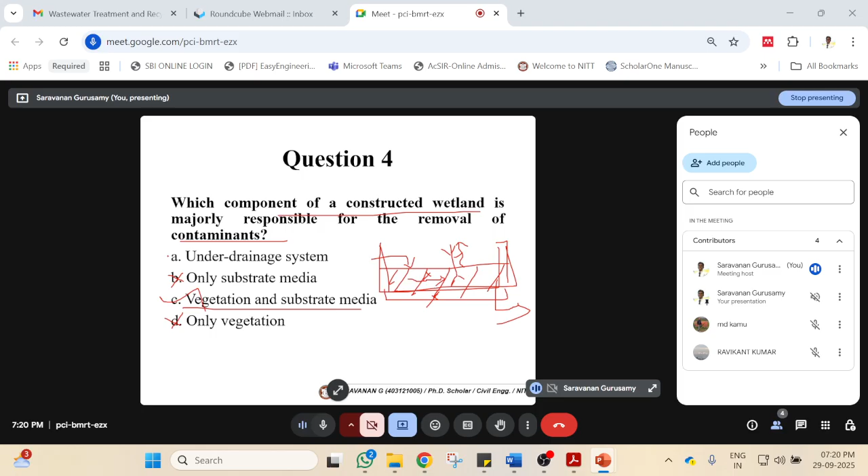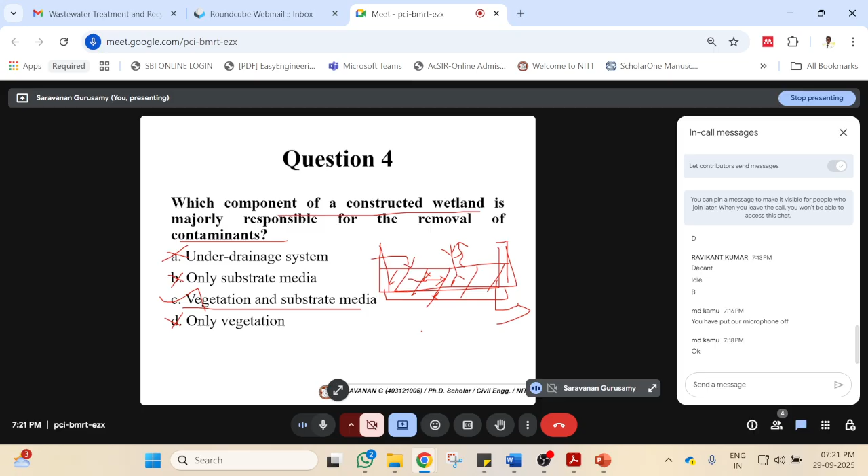You got it? Yes, so matrix adsorption and plant uptake for both nitrogen and phosphorus nutrients. Which component of a constructed wetland is majorly responsible for removal of contaminants? We have an in system, an out system, a liner system, a reactor system - I mean the tank, we have a substrate - I mean the base, we have a plant, that's it, right? So which component? Under drainage system? No. Substrate media only? No. Vegetation and substrate media, because substrate media will act as filtration and sedimentation, vegetation will act as nutrient uptake. So this is correct. Only vegetation is also wrong, only substrate is also wrong. Under drainage system has no role. So option C is correct. All this will act as simply mimicking the natural wetland system. That's why it's called Earth's kidney for the purification of water. Okay, so the substrate media and vegetation both will help in the treatment system.

Okay, which of the following statements are correct regarding different types of constructed wetland? We have surface flow and subsurface flow. In subsurface flow, we have horizontal, vertical, based on the flow. They are saying free water surface, that is surface water. Water will be there. Constructed wetlands are most likely to replicate the natural wetland. That is correct. A wastewater influent flows horizontally through the basin in a horizontal subsurface flow constructed wetland - so water will flow horizontally, that is correct. In a vertical filter stage, the horizontal filter stage may be combined in a hybrid wetland - both vertical and horizontal filter stages combined together are called hybrid, so that is also correct. So all the above. The answer is all the statements about constructed wetlands are correct.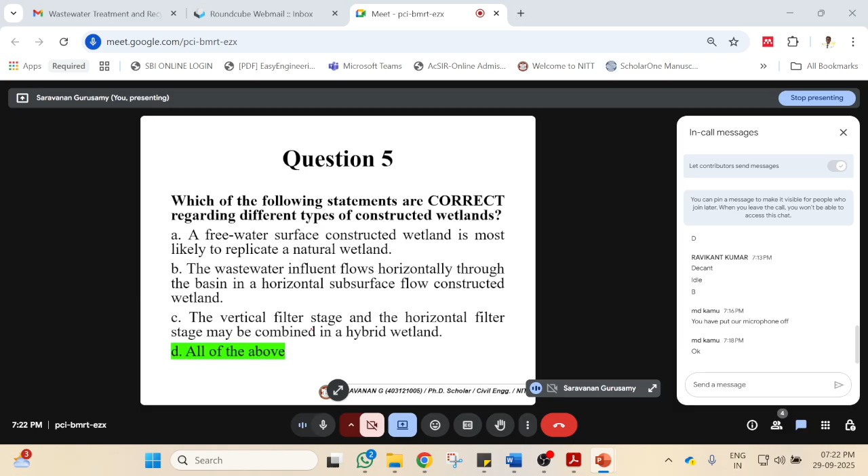You got the whole system? Yes, so free water surface is simply replicating the natural wetland. First statement is correct. In horizontal flow, water flows horizontally through the basin. In vertical flow, water is pushed from top to bottom. In a hybrid, both vertical and horizontal matrix will be combined.

Okay, sixth - identify the most appropriate option for statement A and B. A is subsurface flow: constructed wetlands can either be horizontal flow or vertical flow, that is correct. Surface flow, subsurface flow, horizontal, vertical, again combined or hybrid. So subsurface can be classified into vertical, horizontal - that is correct. Wastewater is poured or dosed onto the surface from above using a mechanical dosing system in horizontal subsurface flow type - that is wrong. In a vertical flow type only, water is pushed from the top.

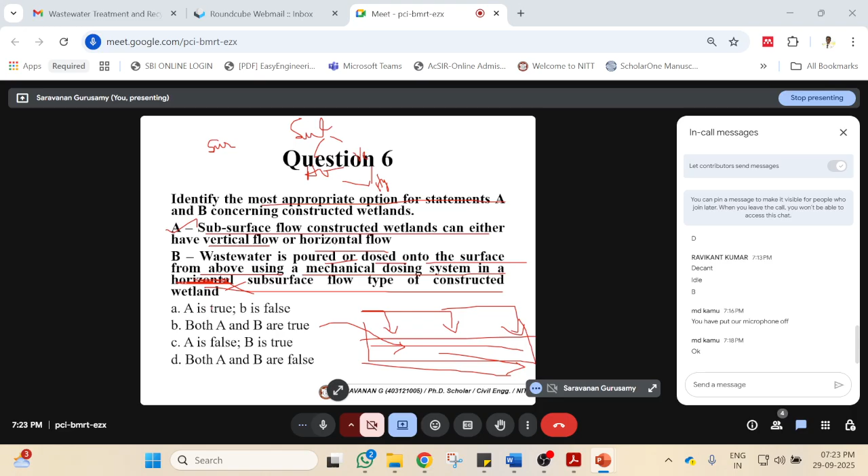In horizontal flow, there is no pushing. Through gravity and side slope, water will flow. So it's vertical subsurface flow only, where water is dosed or poured from the top. So statement 1 is correct, 2 is false. A is true, B is false. Are you getting this? If you have any doubt, please post it in the chat box.

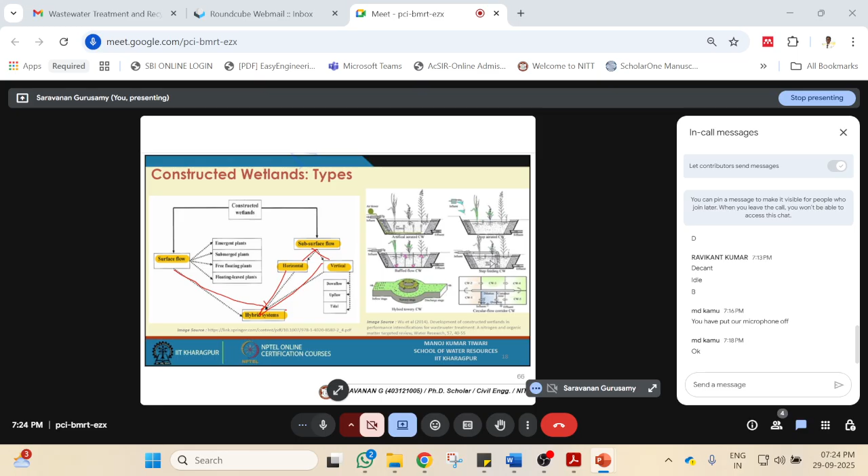See, horizontal, vertical, hybrid - you can also merge along with the surface flow. In the vertical flow only, the wastewater is poured or dosed on the surface above the mechanical dosing system, through the mechanical dosing system.

In a sequential batch reactor, SBR, where is the sludge blanket majorly generated? What are the stages? First, fill. Second, react. Third, settle. Fourth, decant. Fifth, idle. Again we are filling. So this is a continuous cycle, sequential batch reactor.

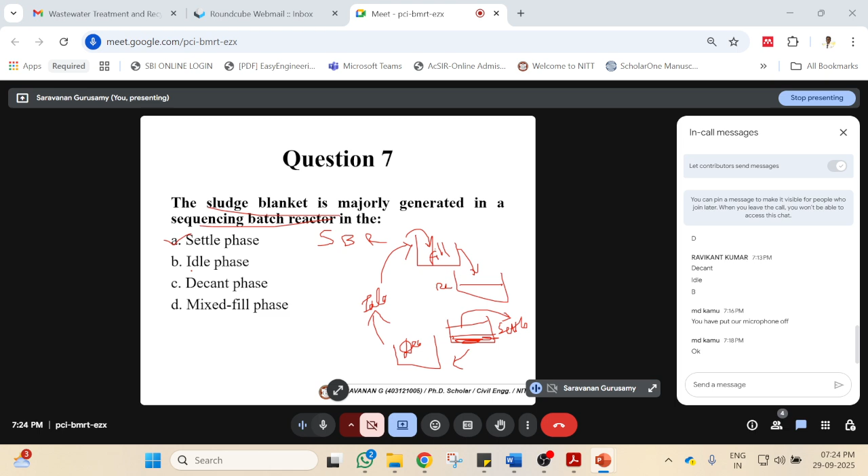Which stage will sludge be settled, forming a sludge blanket? Settling stage only - sludge will be settled and there is a sludge blanket. So settle phase is where the sludge blanket will majorly generate. In the settle stage, sludge blanket will be formed and the top will be clear supernatant, which can be taken out in the next stage, the decant stage, as clear effluent.

Eighth question: which of the following is not an integral component of SBBR, sequential batch biofilm reactor? Aeration for oxygen supply - in a sequential batch reactor also we need air, along with the biofilms, so that is correct. Biofilm growth on media - media is required, that is also correct. Membrane for solid liquid separation - do we need a membrane in SBBR? No. Microorganism for organic matter decomposition - all microorganisms will grow on the surface of the media and some will be in suspension also, so microorganism is required, it is an integral component. Which is not an integral component? Membrane. Membrane will be there in MBR, membrane bioreactor.

Ninth question: identify the correct pair concerning the different scenarios of fill phase. In SBR we have 5 stages, and the first phase is fill type. During filling, do we need aeration? Do we need mixing? Based on this condition, we classify into static fill, mixed fill, or aerated fill. Static fill - no mixing, no aeration. In mixed fill, only mixing will be there, aeration will not be there. In aerated fill, both mixing and aeration will be there.

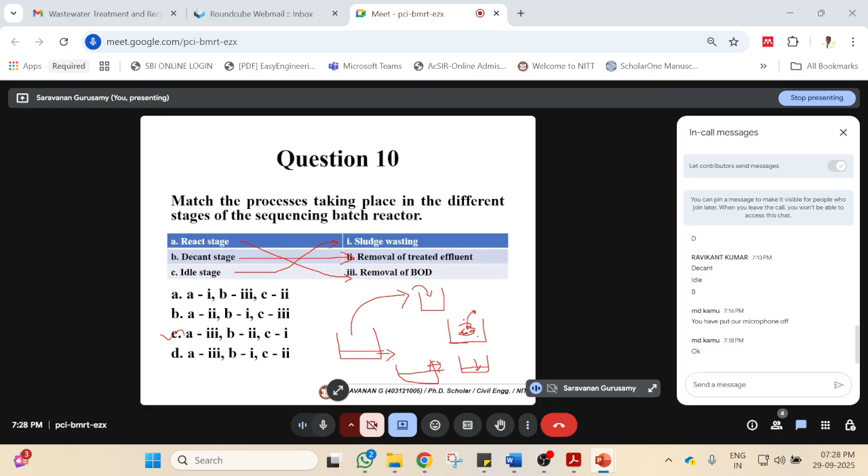Fill stage - nothing will be taken out. In react stage, all the organics will be converted into gas and sludge, so there is an arrow mark out, showing removal of BOD. During settle stage, there is a down arrow mark. During decant stage, there is a top out arrow mark because top water will be taken out. During idle stage, there is a bottom arrow mark - sludge will be taken out. Some sludge will be taken out as wasted sludge, and some sludge will be retained for the next cycle. So there are 2 arrow marks here, 1 arrow mark here. You got it? Yes.

11th question: identify the incorrect statement. An SBR requires a continuous supply of energy for its operation - yes, we have 5 stages, and for all 5 stages we have energy requirement. When an SBR is combined with biofilm growth on the surface of the support media, it is called MBR - no, it is called SBBR, sequential batch biofilm reactor. In SBBR, the biomass grows as a film on a small plastic carrier that moves freely in the wastewater - that is correct. So which is the incorrect statement? Only statement 2 is incorrect. You got it?

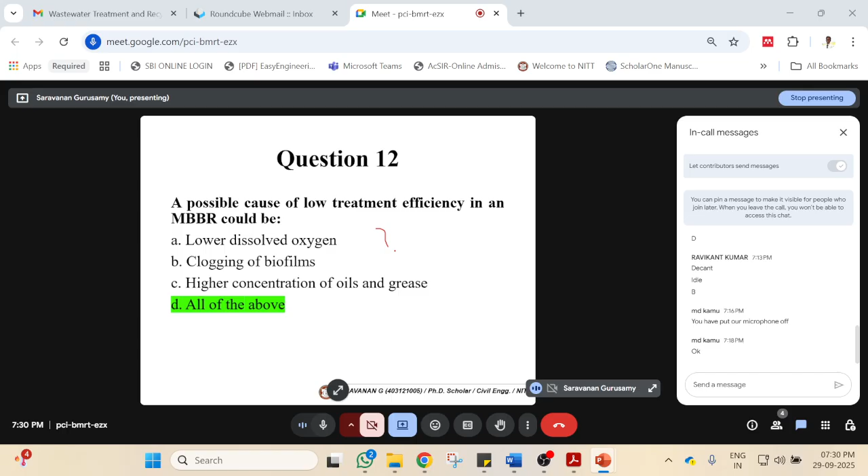If oil and grease is present, that is a limitation of MBBR. Dissolved oxygen is very essential for the effectiveness of biofilm, and we are not supplying enough. Clogging occurs due to non-availability of primary settling tank, causing a clogging problem. These three are important limitations of MBBR in India.

13th question: biofilm based biofilter process combined with the activated sludge process. In ASP there is aeration. Biofilm, biofilter - so there is a biofilm and biofilter. What is this called? MBR or MBBR? ASP combined with the biofilter, so there is a membrane and biofilm, so it is MBBR, I guess. Yes, you got it - there is biofilm, aeration similar to ASP, and a membrane - MBBR.

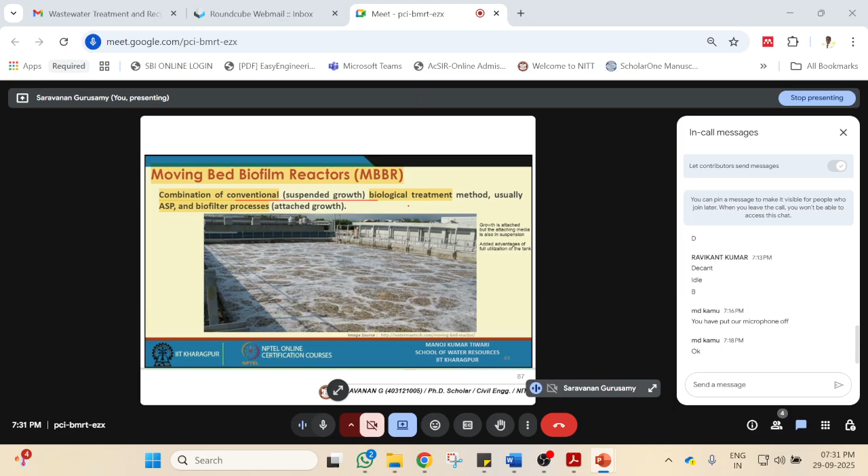Hope you got this with the name itself - moving bed, so there is biofilm, biofilter, bioreactor, moving bed with the membrane. This is a combination of conventional ASP biological treatment and biofilter process - attached growth.

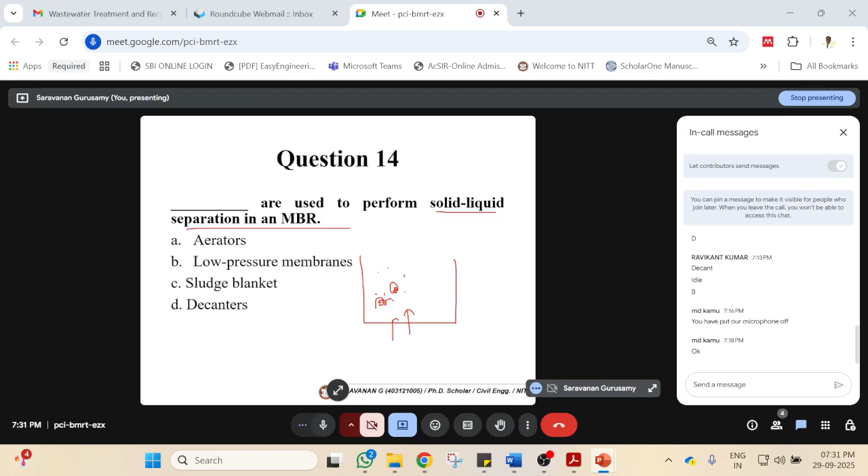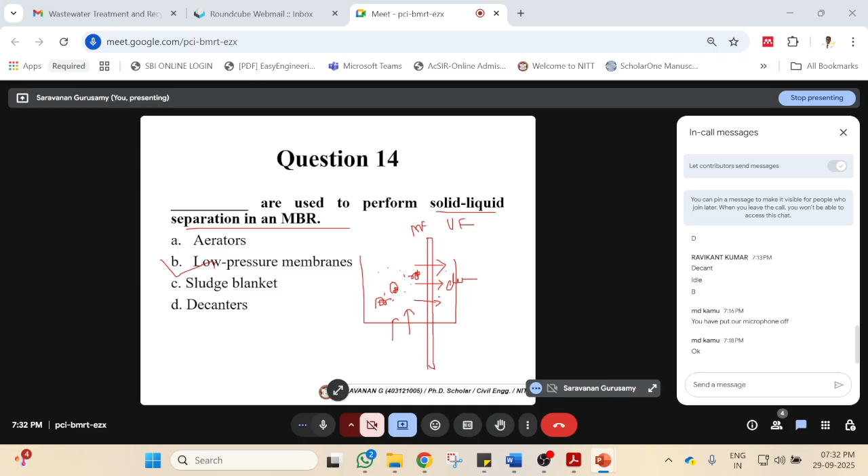14th question: devices used to perform solid liquid separation in MBR. In MBR, similar to ASP, we supply oxygen and microbes take up the incoming organics. In ASP we would settle, but instead of settling, we add a membrane that blocks the sludge. So to perform solid liquid separation, we use low permeable, low pressure membranes like microfilters or ultrafilters, and clear water comes out.

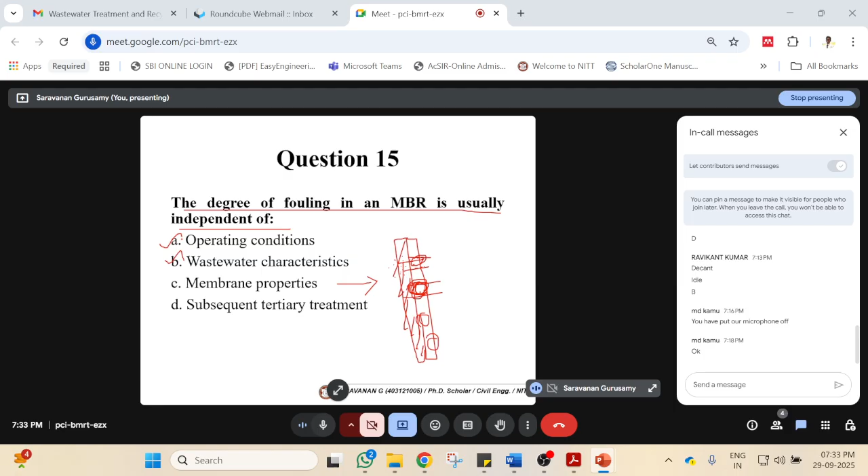Final question: the degree of fouling in MBR is usually independent of what? Membrane fouling occurs because the membrane has pores of different sizes, which get clogged by flocs, salts, or microbes. This causes pore clogging, pore narrowing, or cake formation - different fouling mechanisms in MBR. The factors affecting fouling are influent water characteristics, operating conditions like HRT and SRT, and membrane properties.

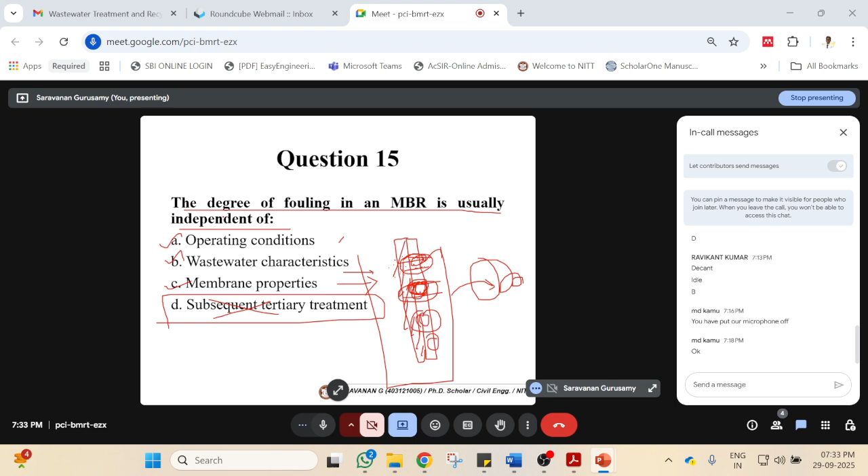It is independent of subsequent tertiary treatment, because whatever we do afterward does not depend on membrane fouling. Membrane fouling depends on the operating conditions of MBR, the inlet wastewater characteristics, and the membrane pore size properties - not on subsequent treatment. So the factors affecting membrane fouling are membrane characteristics, operating conditions, wastewater characteristics, and biomass characteristics.

So today we have discussed constructed wetlands, SBR, SBBR, MBR, and MBBR. These are alternate options to the conventional treatment systems. Hope you got a clear view on this.